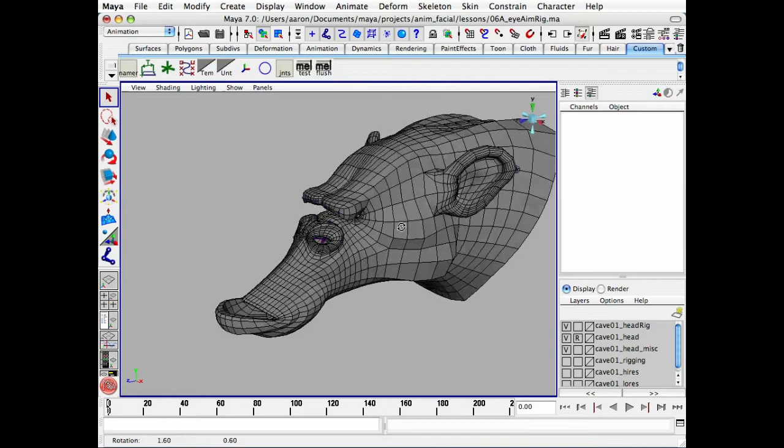So in this lesson, we're going to start rigging some of the inner mouth components of our character. We're going to start by rigging this tongue in a forward kinematic fashion. We'll rig it again in the next lesson using a different method. We're going to start with an FK tongue.

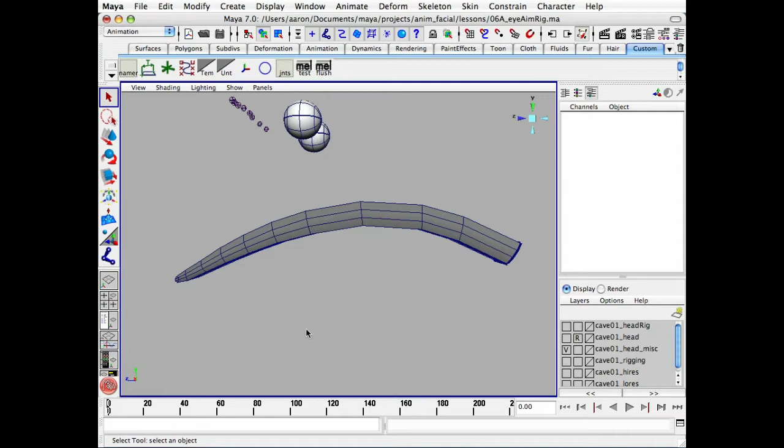What we're going to do is pretty straightforward, as we're going to draw a series of joints down the length of the tongue so that an animator can curl either up or down. We're also going to add a series of joints at each edge loop that emanate out to the sides so that you can curl the tongue up in what we call the tongue taco.

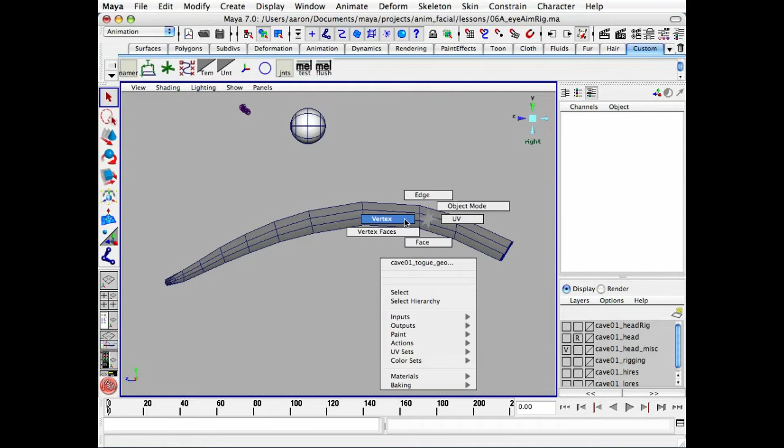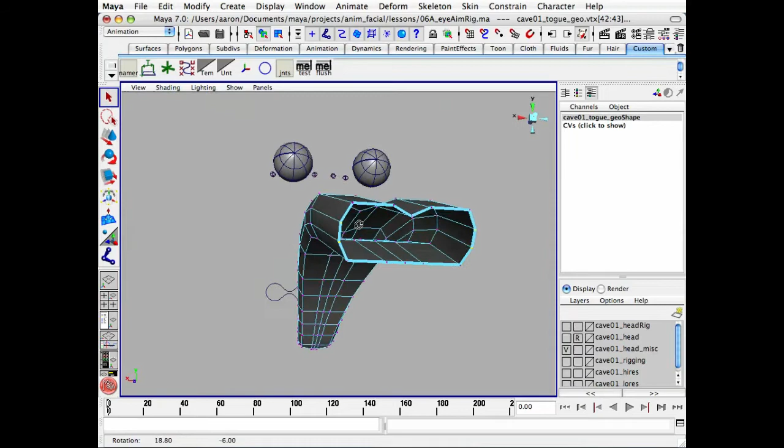Okay, so I'm going to switch to a side view and just start drawing some guides by creating clusters, which average the position here. So we'll be able to draw joints directly down the center. And then from here we're going to simply, holding down the shift key, draw out to the side so that we'll have our joints that emanate out to the side.

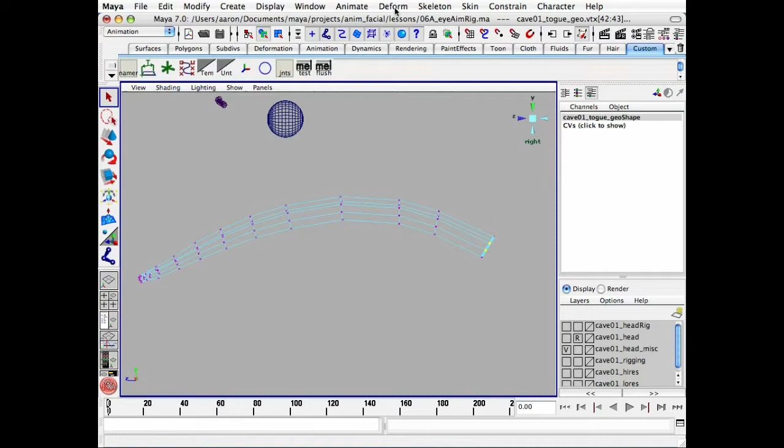Okay, so back to creating these clusters, which are just visual guides. So with those 4 vertices selected, Deform, Create Cluster. I'm going to switch to displaying vertices in the component mode. We can go a little faster here. Actually, I'm going to skip that one. Deform, Create Cluster. Now I'm using the G key to repeat that last used command.

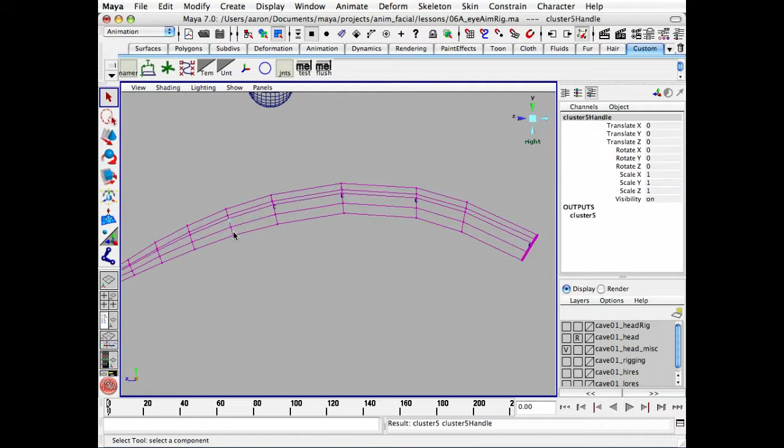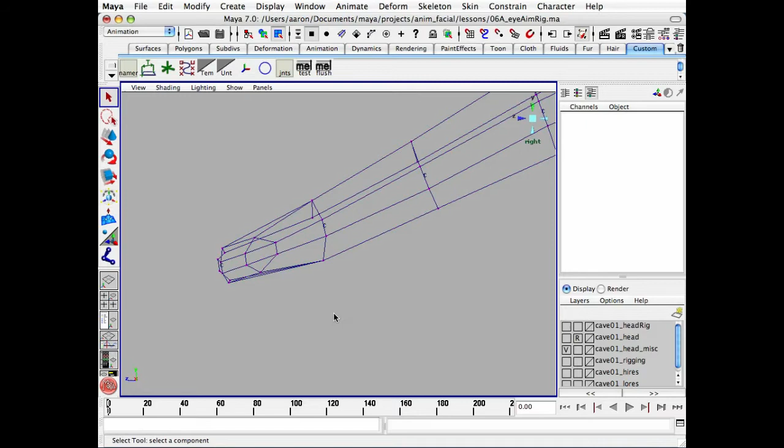I'm going at a fairly high resolution for these tongue joints, since there's going to be quite a bit of movement that we're going to want with this. Okay, so now we have all of our clusters. You can see, let's turn off our geometry here. They're running down the center of this tongue.

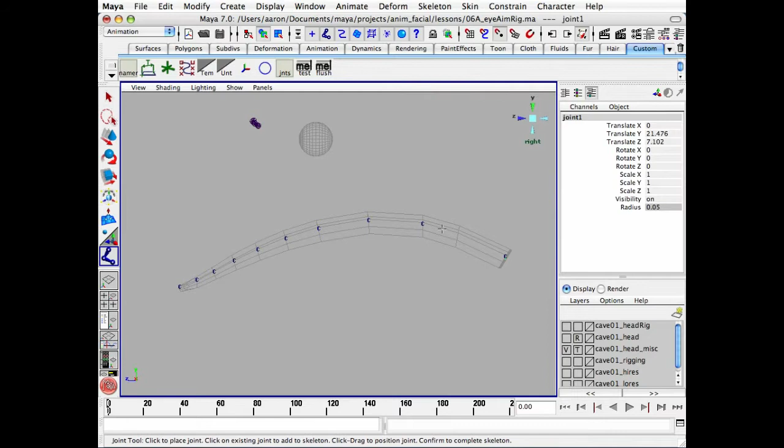Okay, so switching back to the side view, I'm going to start drawing our joints using these clusters as snapping points. So I'm going to enable snap to points, and then select Skeleton, Joint Tool, and just start drawing these tongue joints, clicking once on each cluster and snapping to that. Okay, let's select all of our tongue joints here and change their radius. Okay, it's a little better.

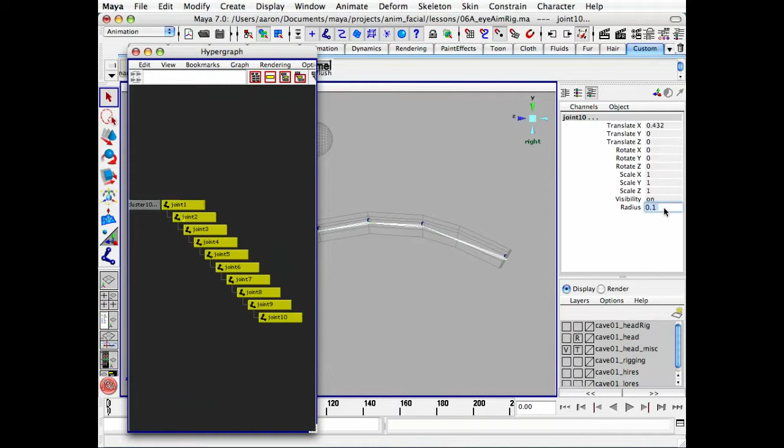Okay, so now with these tongue joints selected, I'm going to do 2 things. First, display their local rotation axes to see if we need to make any adjustments. So Display, Component Display, Local Rotation Axes. So I'm going to want to rotate all of these 90 degrees on X so that their Y-axis is pointing out toward the left side, which is a convention I've kept with this character throughout.

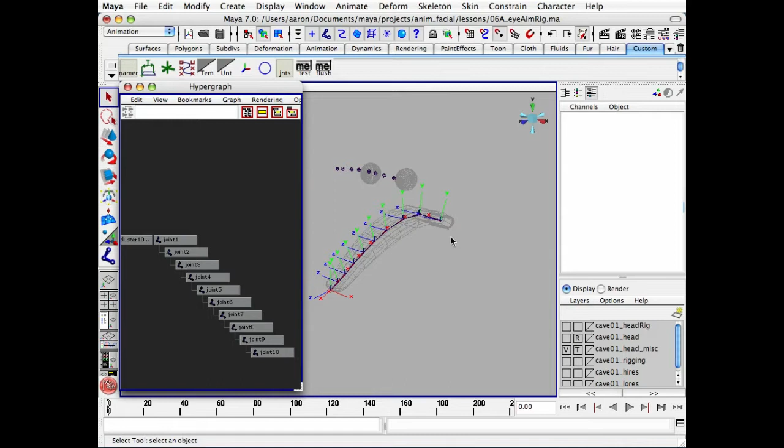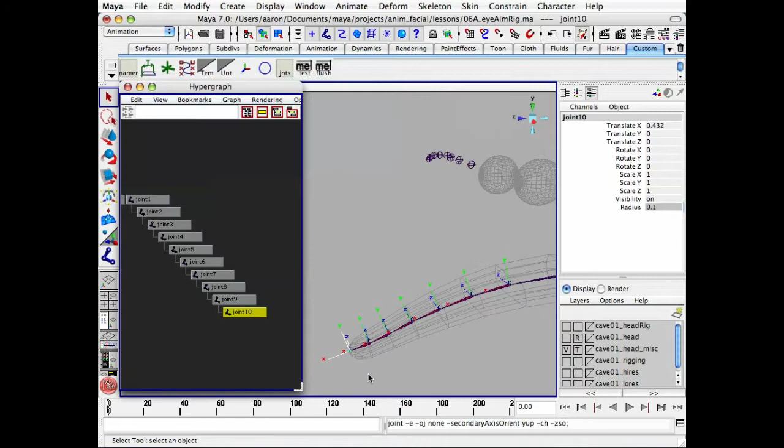But first I'm going to orient the last joint so that it matches the orientation of its parent. Just a habit. Do that by selecting Skeleton, Orient Joint tool. It should still be set on None, which I've been using throughout the tutorials here. So there we see it snap to match its parent.

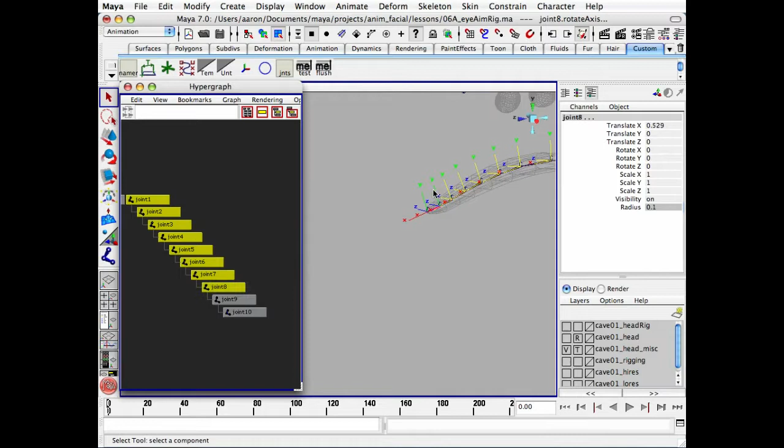I'm going to switch to component mode and enable the question mark icon, which is local rotation axes selection. Just go about selecting all of these local rotation axes, shift selecting them. Once again, it's always important to have a consistent orientation with your joints.

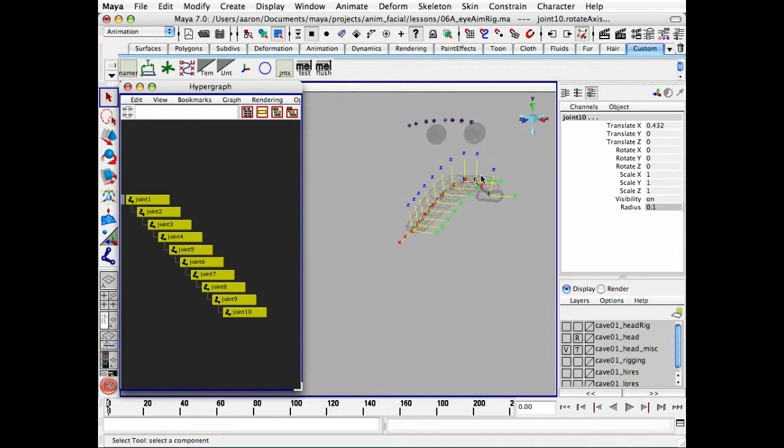So now in the command line, I'm going to type in rotate -r 90 0 0. So we're going to rotate all these local rotation axes 90 degrees on X, which points them to the left side of the character. I'm going to select all these clusters and delete them. No longer need those.

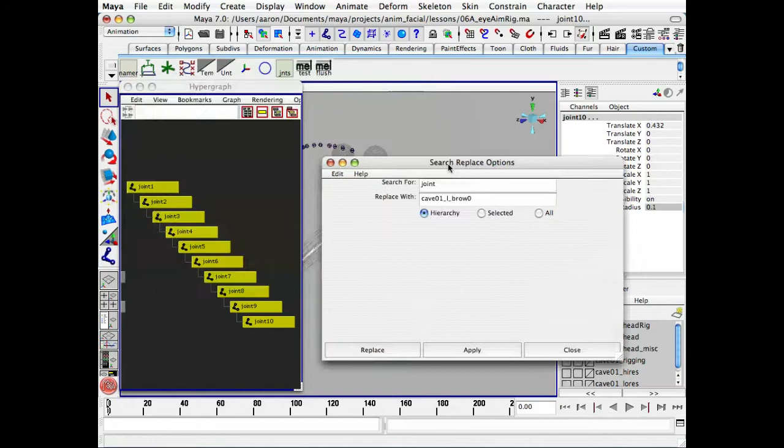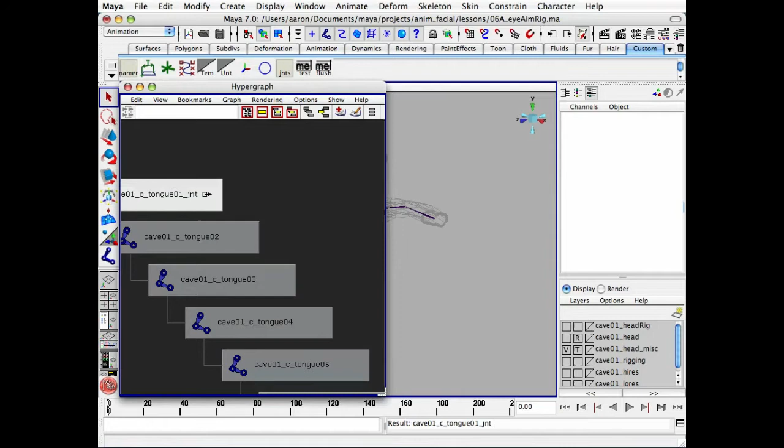Okay, so now let's do a quick renaming. Modify, Search and Replace Names. We're going to search for every instance of joint and replace it with cave01_c_tongue. Okay, I'll take the time to go in and manually add these JNT suffixes.

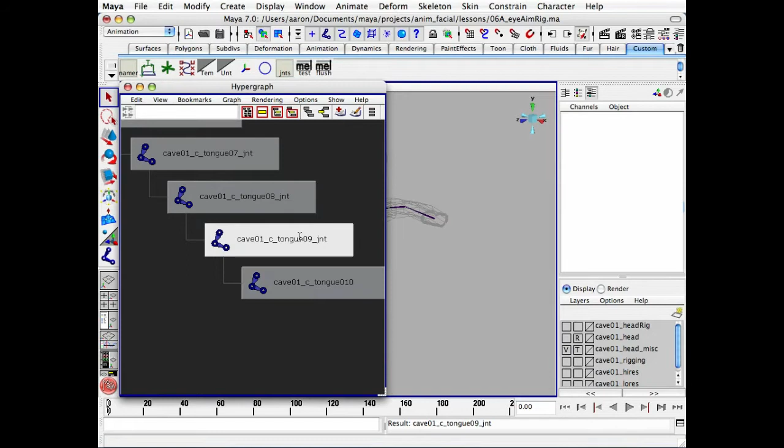Although this is only an FK tongue joint, you'll see that it's quite flexible. It'll give a lot of movement to this simple tongue here, especially when we add the side pointing joints. Then we're going to do something a little extra to help with the deformations. Okay, so this last one we're going to call it end. Okay, there we go.

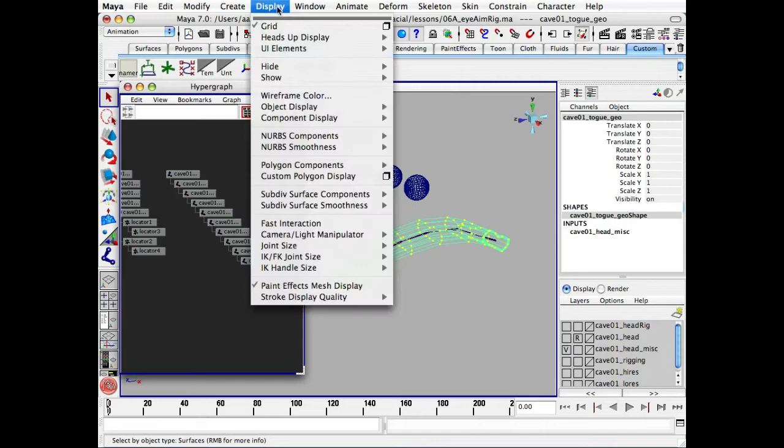Okay, select this, and I'm going to turn off the vertex display on the tongue. So now what we're going to do is, for each joint, we're going to create another joint pointing out to the left as well as the right.

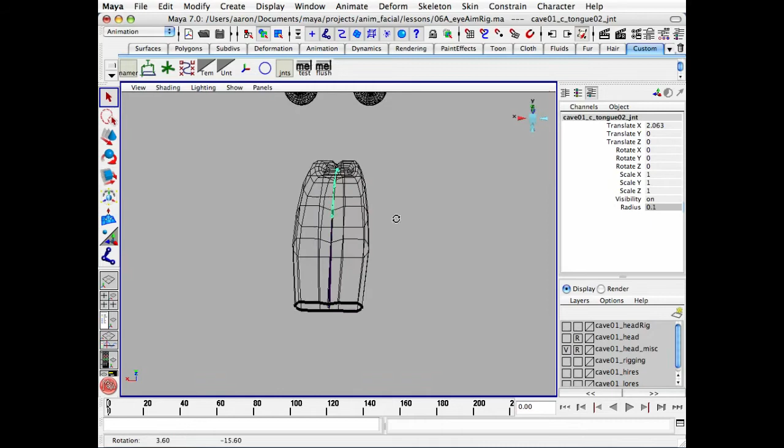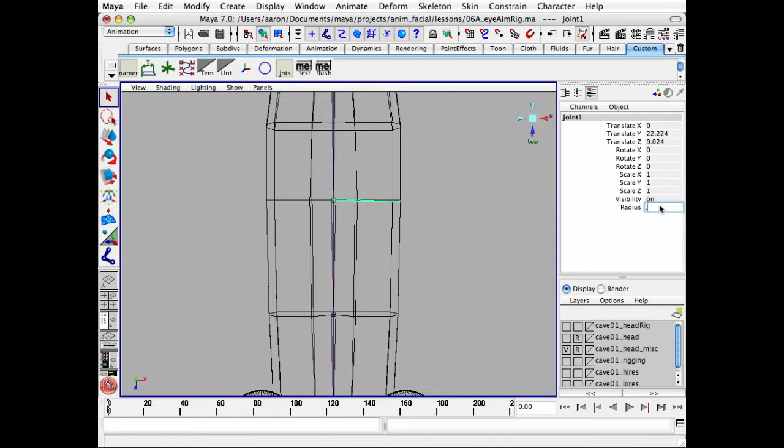Okay, holding down V for point snap, and then shift, switch to a top view here, and then shift, we'll just drag out straight to the side. There we have our first joint pointing out to the side.

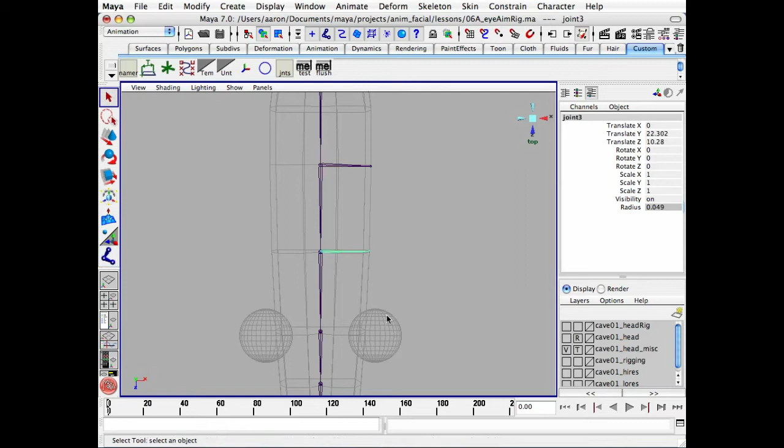We're going to repeat that for each of these major joints here. So point snap the first joint, hold down shift to drag it out in a straight line. Oh. Okay, let's try this again. Okay, there we go.

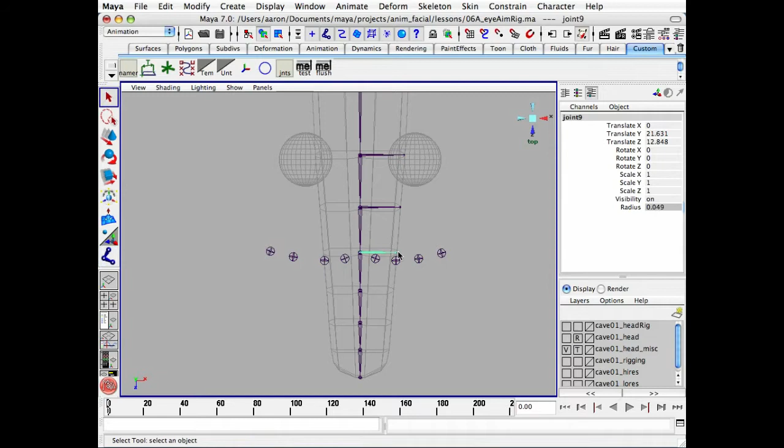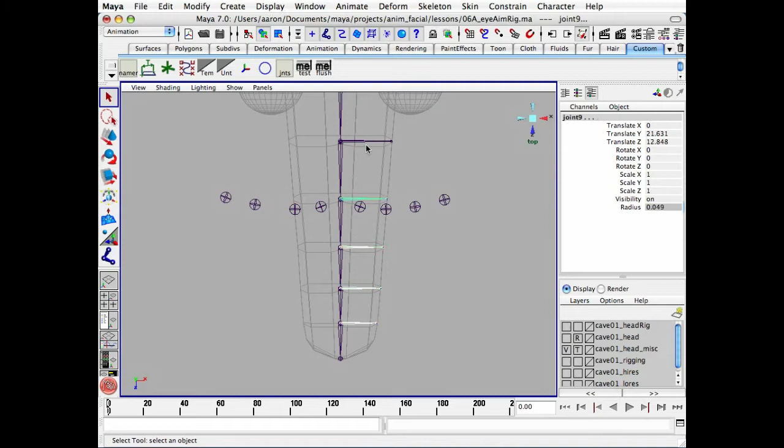Okay, just a couple more. Okay, and that will do it. Just changing their radius.

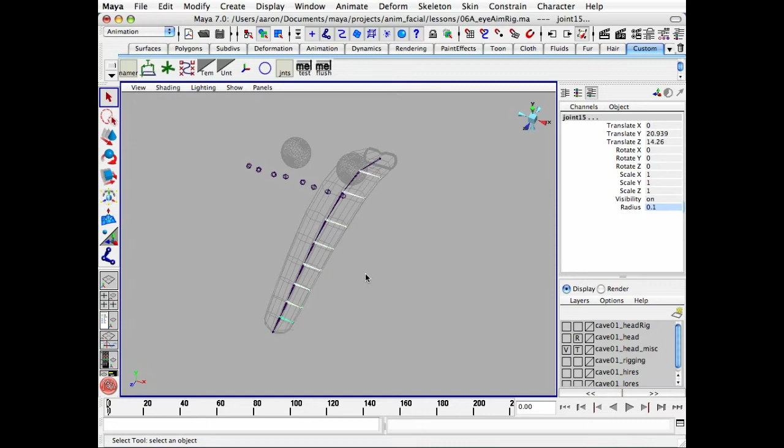Okay, so now that we have all this, I'm going to rename these joints. Since we're going to mirror them, I'm going to take the time to quickly rename them. We're going to search for every instance of joint, and this will be L tongue.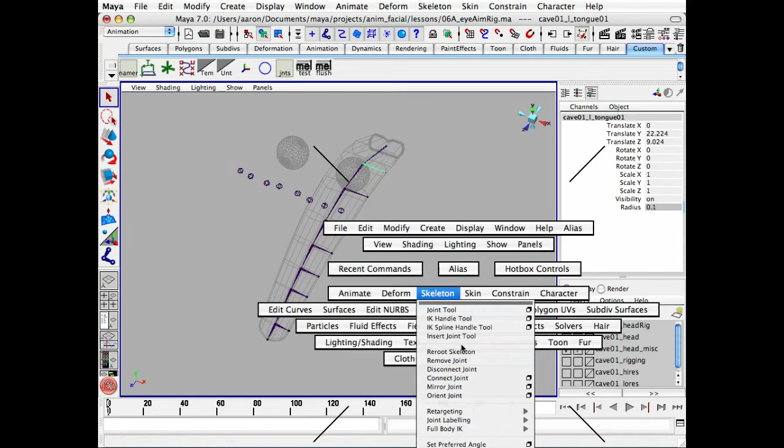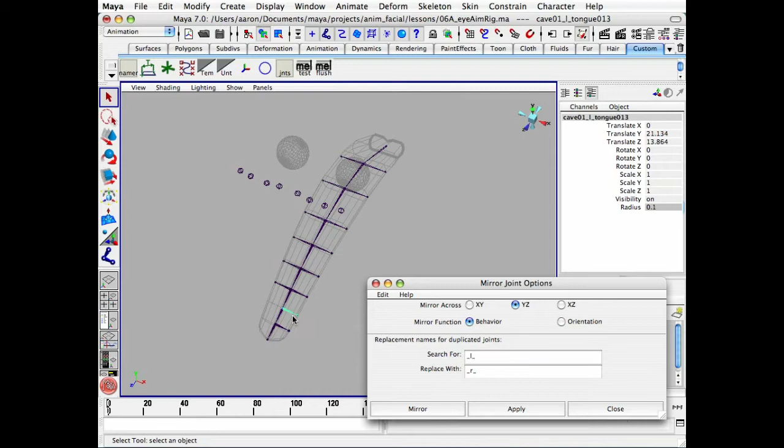So now I'm going to select them and mirror each one across the YZ axis, searching for the left side designation and replacing it with right. I'm just hitting the G key to reactivate the last tool that I used, in this case the mirror joint options.

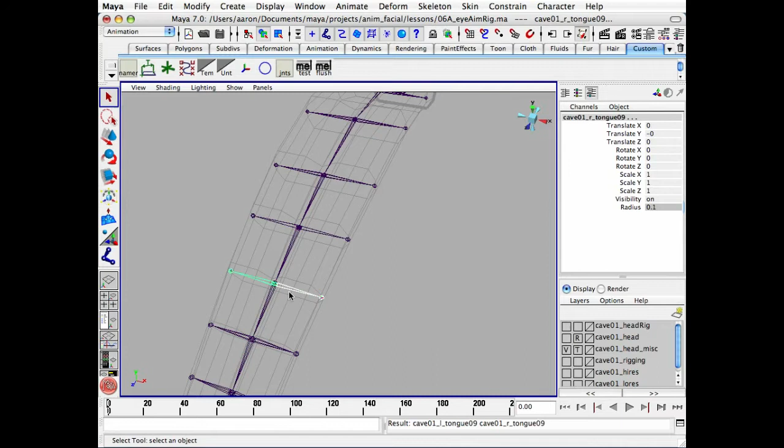Okay, so I'm going to quickly parent each of these to a corresponding joint. Just to demonstrate something. Now this is not going to be our final tongue rig, but I just want to demonstrate why we're going to build the next type of rigging for this tongue. Okay.

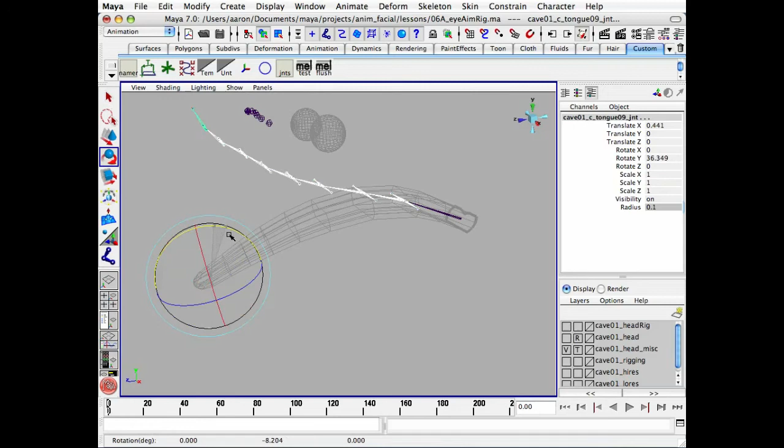So I'll just curl this tongue, grab some of these joints. Okay, curls fine, up and down. When we go side to side, and this is fine too. When we go side to side,

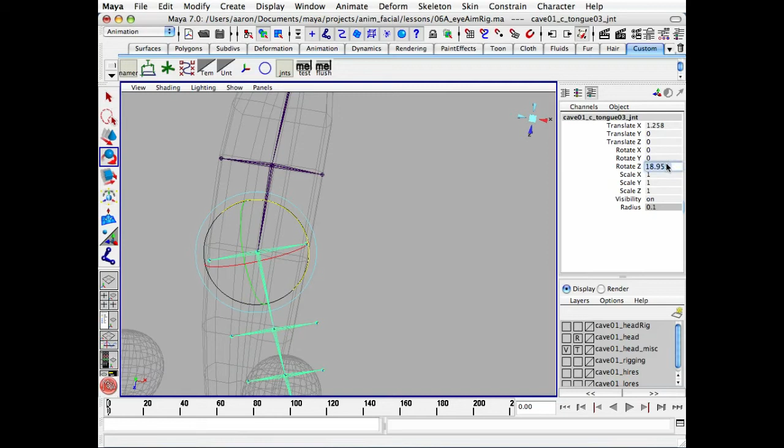what I would like to do is, for instance, if this is 90 degrees, I would like to average this rotation so that these two side joints, the left and right joints, are at a 45-degree angle. So that way you'd get a nice curved deformation.

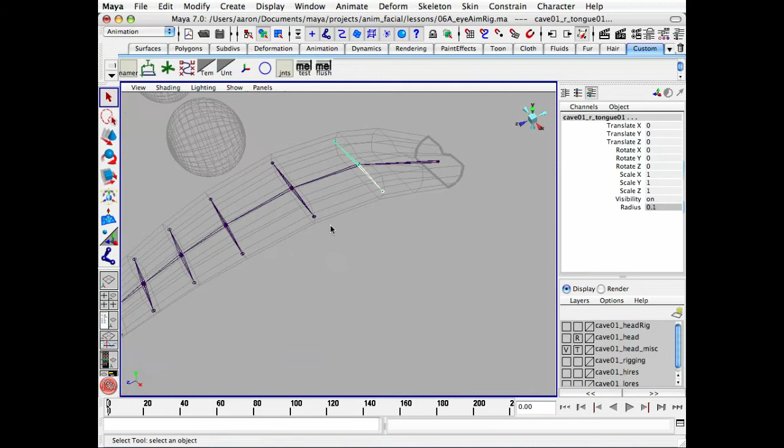So I'm going to do that by using multiply divide nodes to negate half the rotation of the main joints. So I'm going to unparent these.

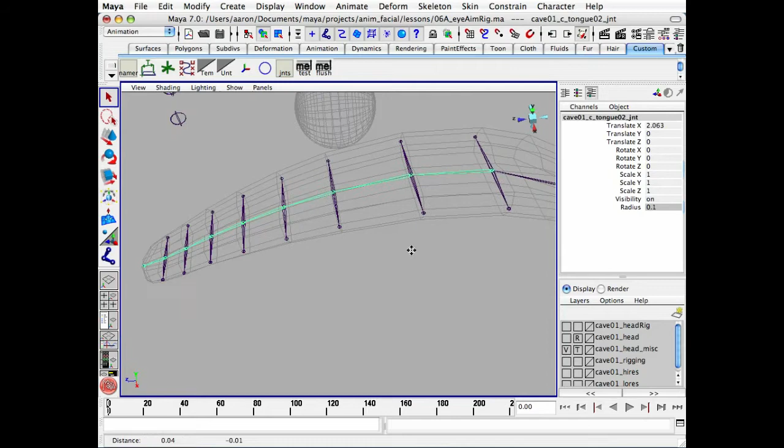Okay. So first I'm going to select this tongue 02 and duplicate it. So edit, duplicate. And this will serve as what I call the averaging joints. So I'm going to select all these. I can delete the end here.

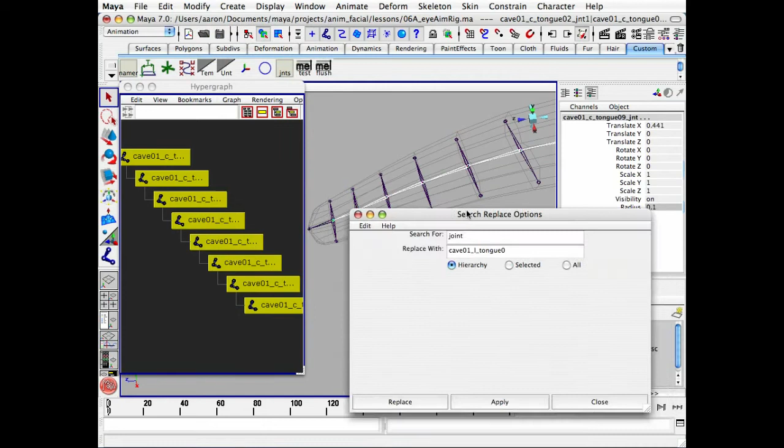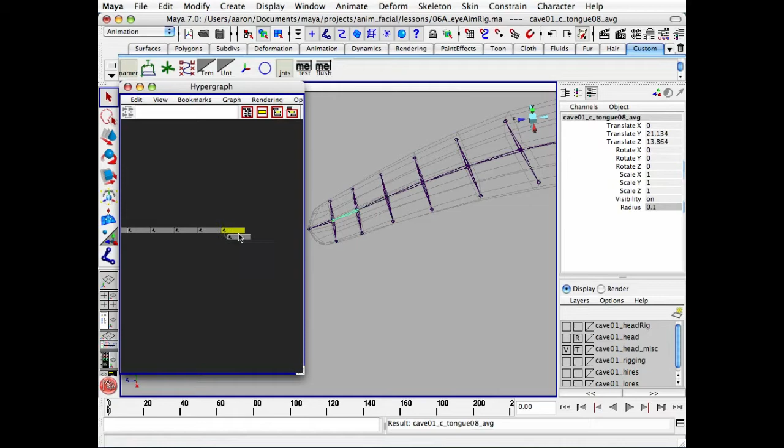And I'll modify, search and replace names, and search for underscore JNT and replace it with underscore AVG for average. Okay, so now I'm going to unparent each of these. Then parent the left and right joints to each of the corresponding averaging joints.

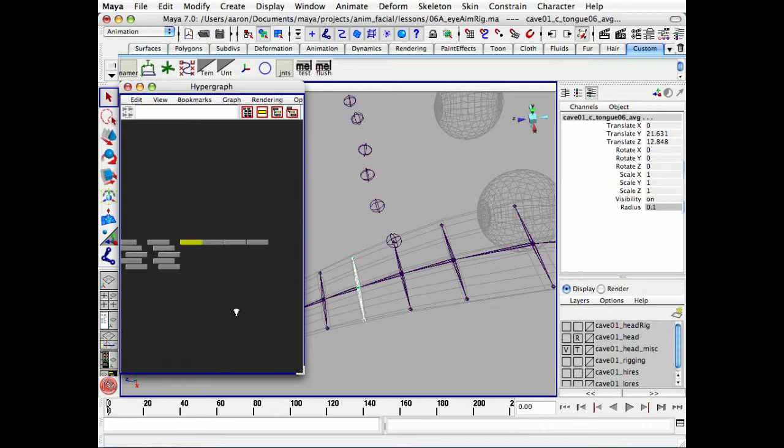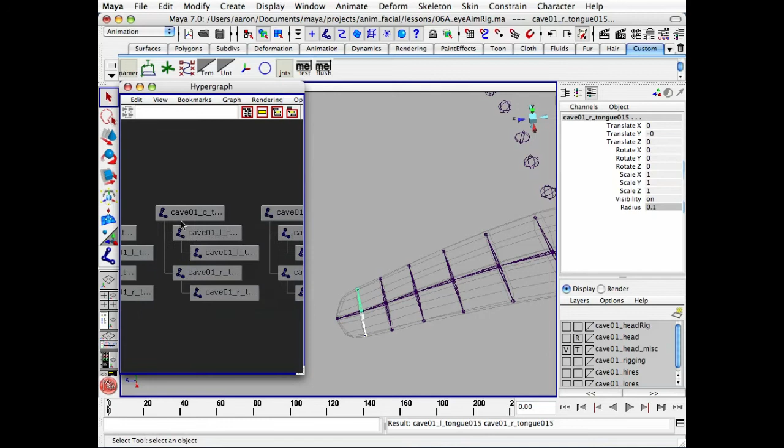Okay, so now we have each left and right joint the child of one of these averaging joints. So I'm going to open up the script editor. Let's clear this out.

So I'm going to create a multiply divide node and then connect the rotation values of the main tongue joint into the multiply divide node. Negate the rotations by negative 0.5 and then connect that output into each averaging joint. So first I'm going to create a multiply divide node.

And since I'm going to repeat this for each of these averaging joints, I'm going to capture the connections that I'm making so that I can simply change the names and numbering and repeat this. And once again, this is something that would benefit from scripting as well, since it's a repetitive, somewhat